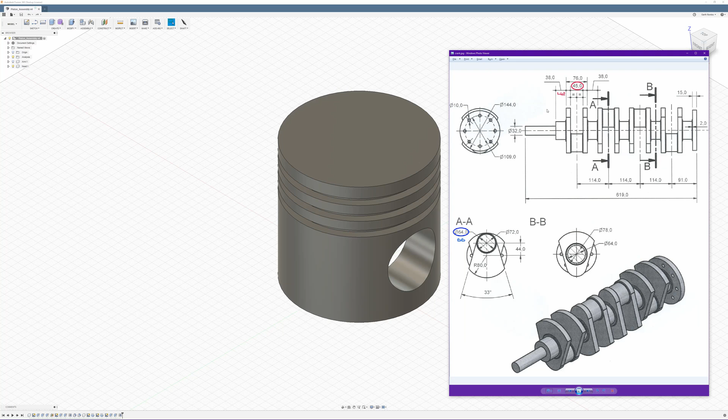Alright, so once again, since we're working with components for an assembly, first thing we'll do is create a new component, and this time we'll call it crankshaft, and then we'll just hide the head since we don't need that.

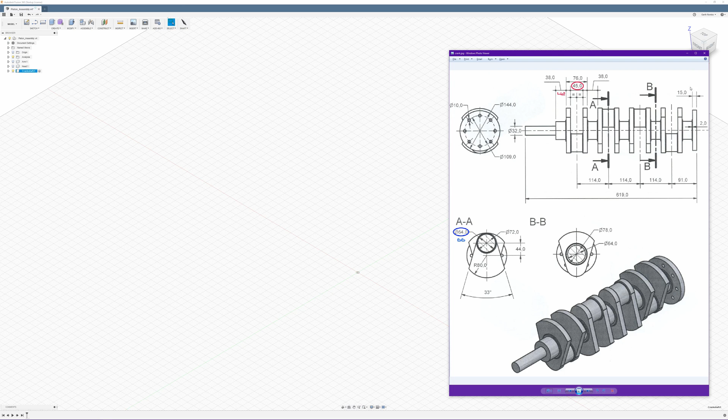And if we look at our drawing, we're going to create this little end bit, which is that little plate down the end there. So if we look at the side view here for it, you can see it has an outer diameter of 144 and a width of 15.

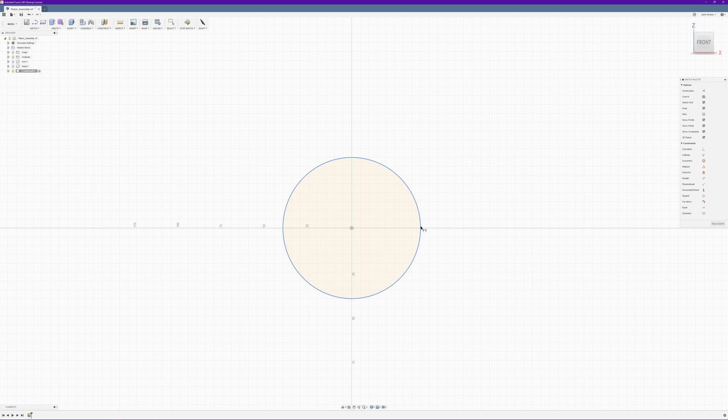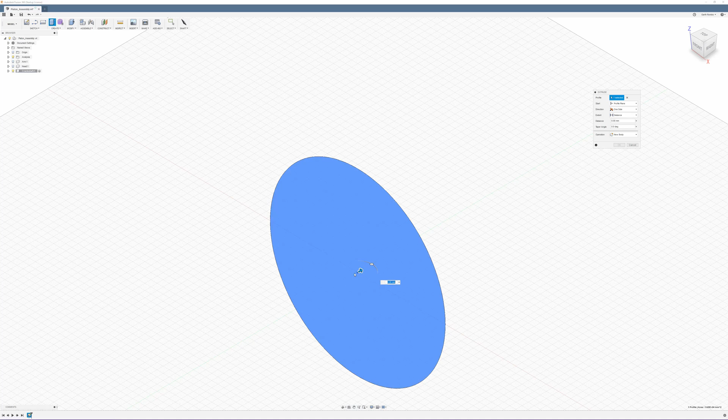So we'll start a sketch. I'll just do it in the front plane. It's C for circle. And then set diameter to 144. Stop sketch. Select the profile, press E for extrude, and drag that out. Just type in 15mm, and we want it to be a new body, so that's all good.

Alright, now if we look at this sketch again, we've got a diameter for those holes of 109, and the hole itself has a diameter of 10.

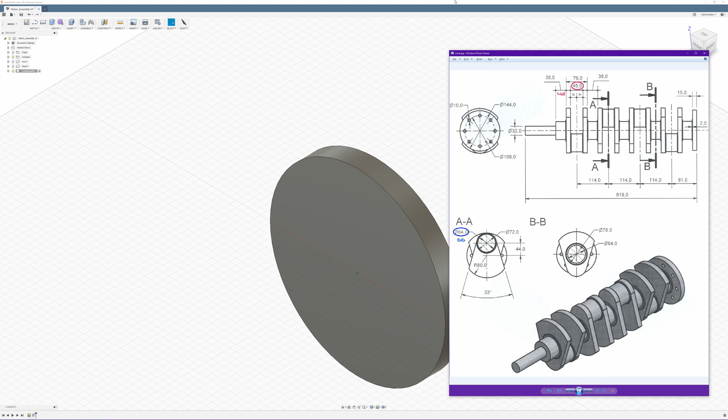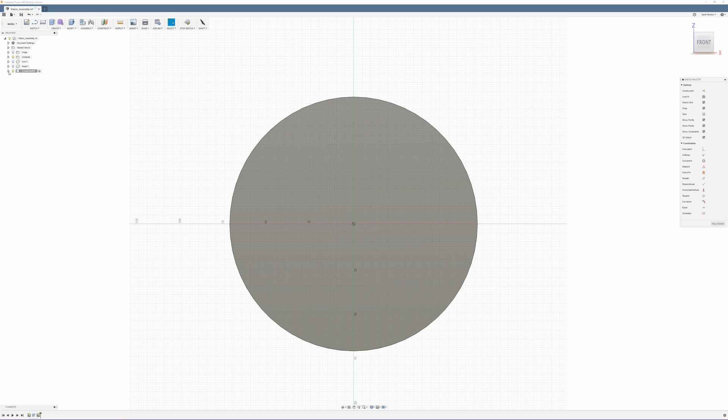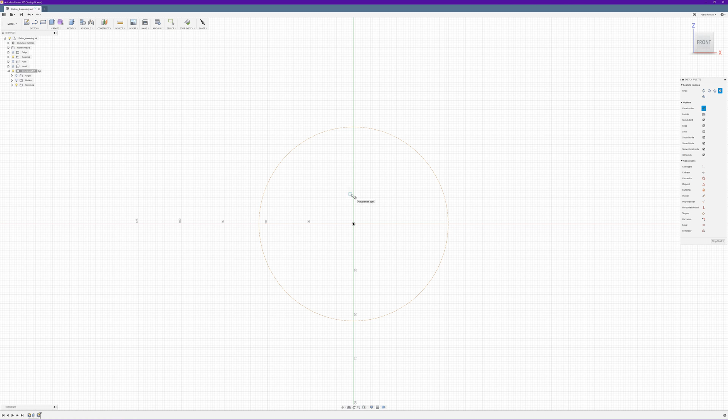Okay, so we'll create a sketch. Since it's on the plane, we'll just do it there as well. Could have done it directly on the face, doesn't really matter. And what we'll do is hide the body for a minute just to make it easier. Turn on our construction, because we're going to use this circle as a reference for where to place our other circle, and I think it was 109.

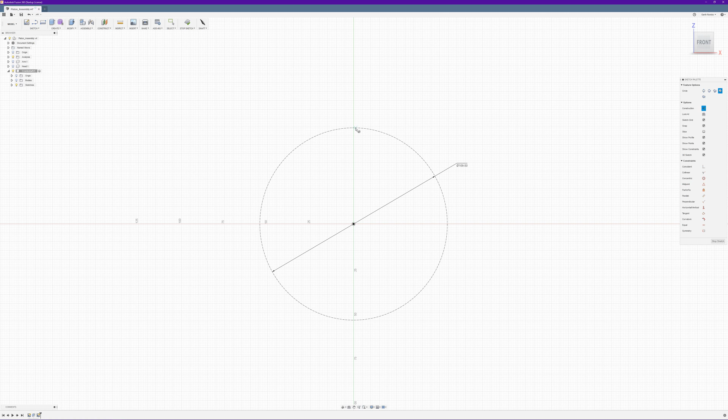Yep. So set the diameter on that to 109, and then go back to our circle tool and just zoom in there. Doesn't seem to want to lock to that one, so it doesn't really want to lock to any of them. Not that it really matters.

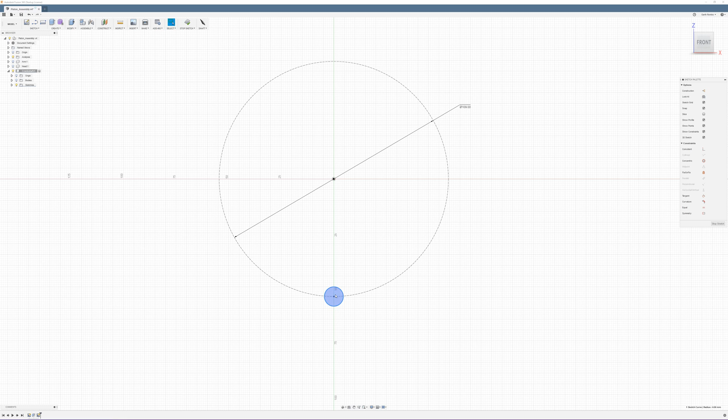So turn off construction. No, have to select it first. Turn off construction, because this is going to be our actual hole diameter. And we could have used the hole tool, but given that we want to put these in a very specific spot, it's probably a bit easier to do it this way. So set the diameter to 10.

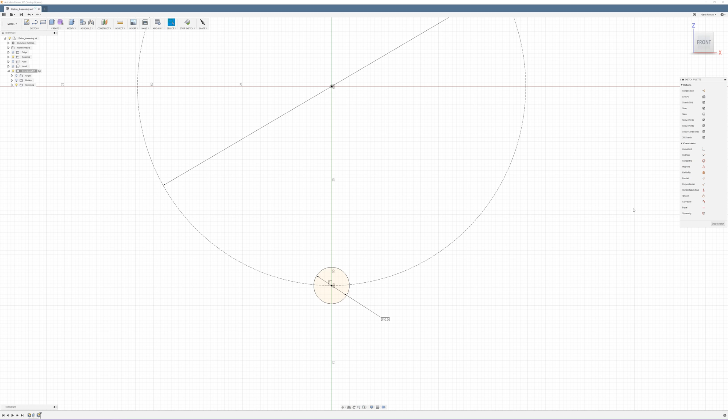And just hit escape. And what we'll do to make sure it is lined up correctly, select that point, and we want horizontal vertical with that, and then we can go, oh actually before we do that, oh actually no, we will do that. Stop the sketch, and then we can unhide our body.

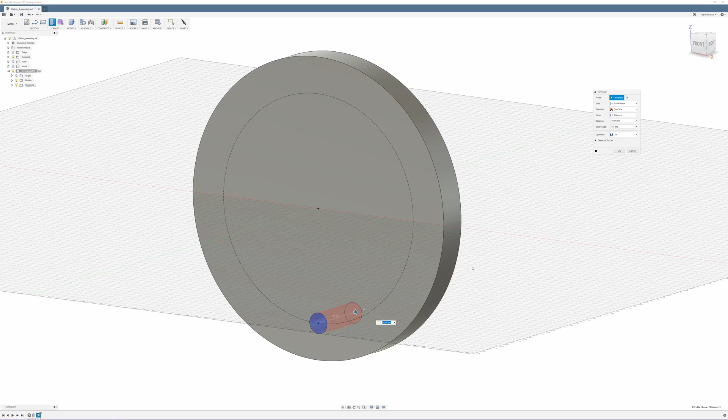Select our profile, go extrude. This time we just want to go all the way through, and we do want it to be a cut. So there's our first hole.

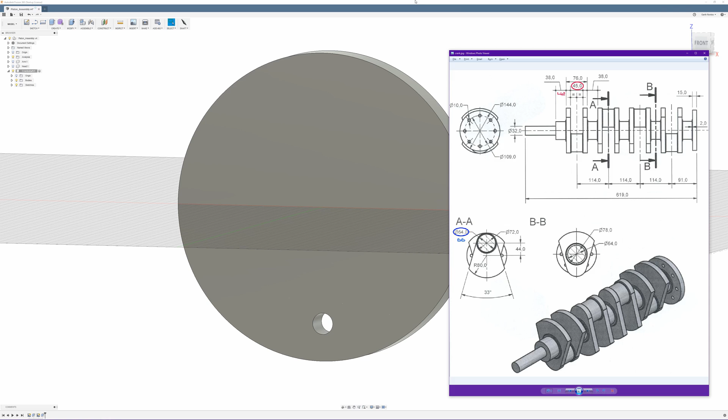Now if we look at the drawing, we've got 4, 5, 6, 7, 8 holes. So what we can do now is pattern.

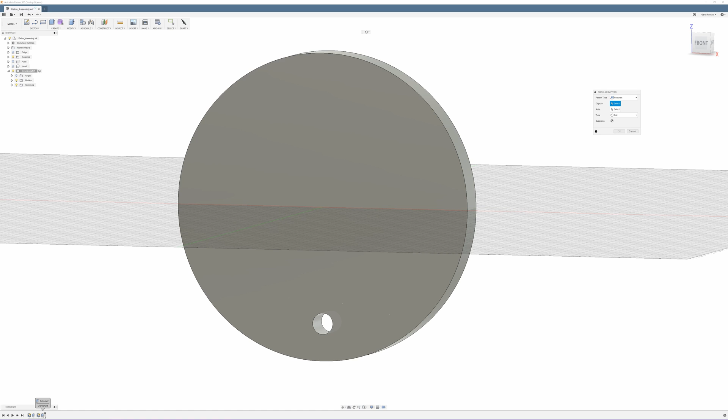Now we want a circular pattern, and we want to do features, and our feature will be that last extrude in the timeline there, and the axis we can select the y-axis, and we do want it to go full, and quantity 8, and compute option adjust, I guess that'll do.

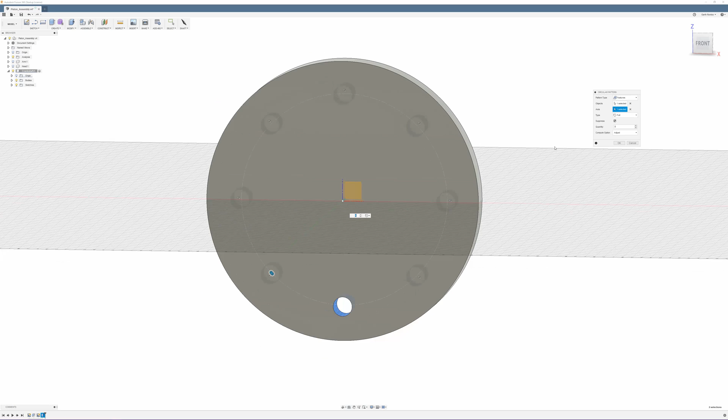Alright, so there's our little initial plate with the holes.

So next thing we want to do is create the central core that joins between the plates. As we can see in drawing B, that has an outer diameter of 78 for the little extrusion bit that sits around the outside of it, and an inner diameter of 64.

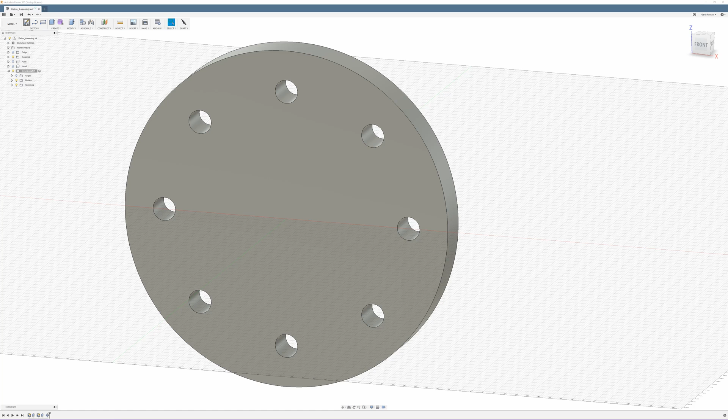So we'll go back and create a new sketch. We can do it on the front plane again. What was that measurement? 78 and 64. So we get circle, might as well do both on the same one. 78, 64. Alright, now we can stop sketch.

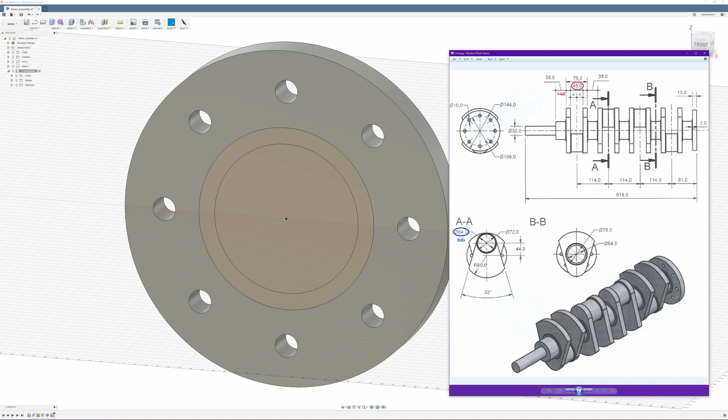And if we look here, the little extrusion thing is 2 millimeters. It's very hard to tell if it's kind of chamfered back towards the surface or not. Doesn't look like it in this one, but the lines there make it look like it is. Probably really doesn't matter, but we'll see how it looks.

So we extrude. This time we want 2 millimeters, or -2 in this case, and we want it to be a join. Yes. Okay.

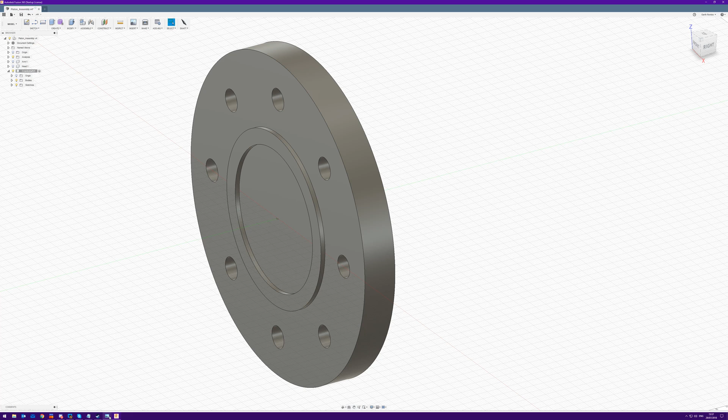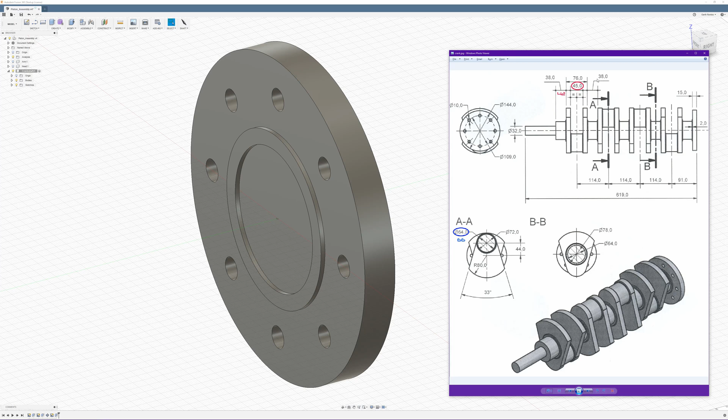And for the next one, that gap there, I'm just going to go off that one there, 38 mil, but that goes from the edge of that plate to the edge of that plate. As we can see here, it's got a distance of 38 between the two plates.

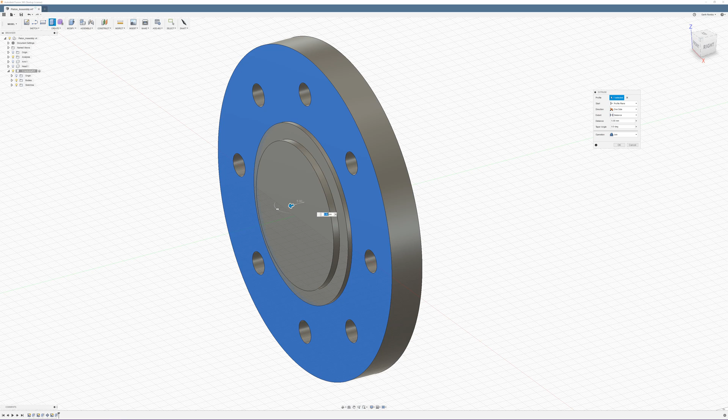So we extrude this one 38 mil, and join. And that's pretty much the first bit of that.

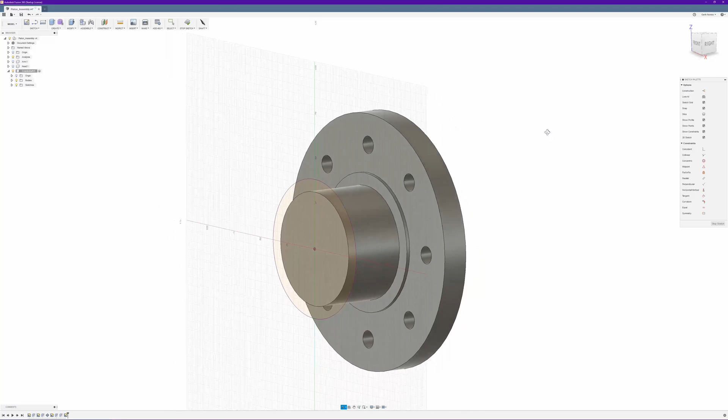Okay, now to create the extrusion on this side, we'll create another sketch. Just select that face, but to save us from having to draw another circle, you can use project include and project the outer circle, and hit OK, and as you can see, that's pulled that across to there for us.

And the good thing about projected geometry in that sense, since we're not altering it or anything, if at a later stage we wanted to make it so that this was actually a little bit wider and we changed the dimension of that original sketch, it will automatically update that projected sketch to match it, which is quite fantastic.

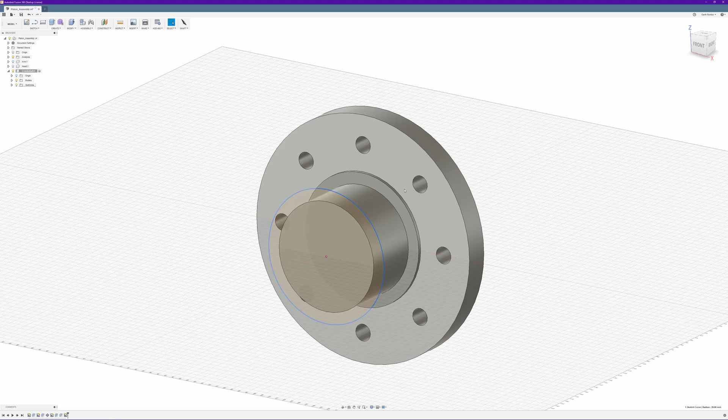But since we do want it to be the same, we can just select the profile itself, hit extrude, and we want to go back in towards it. Just want to make that 2 mil, but we don't want it to be a new body, we want it to be a join.

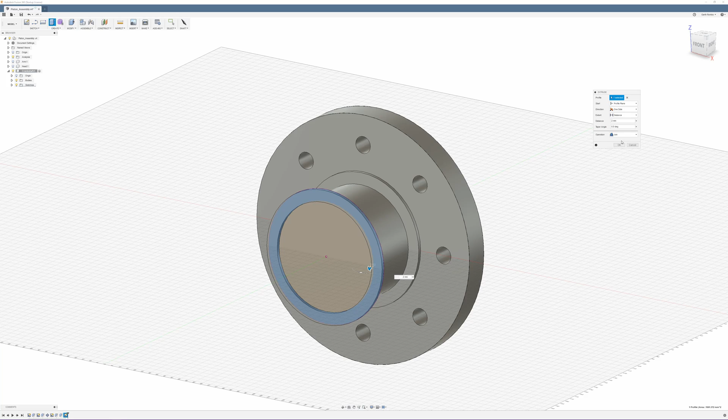Oh, that went the wrong way. So we come back down here and say edit feature, and we'll say -2. That's more like it.

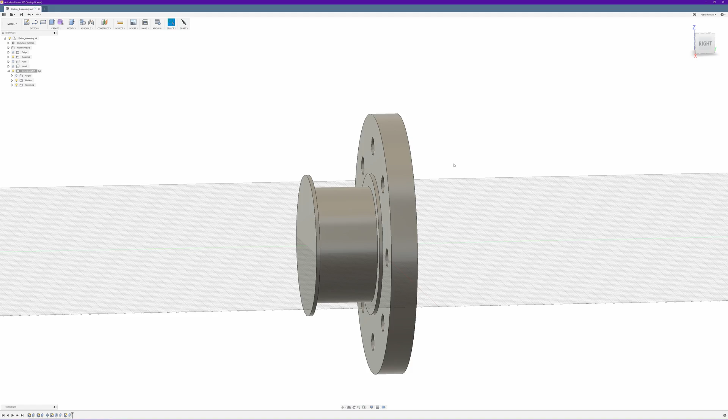So now we're ready to come and create the first of our little weighted plates.

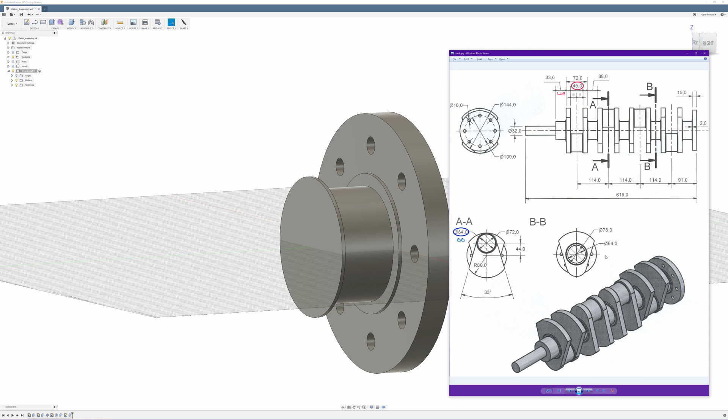Okay, so for this bit we can just create a sketch straight onto this face, and we know the center point is the origin. So if we look at our diagram here, we can tell the center point of this circle is 44 mil up from the center point of the origin, and then we've got a 72 mil circle for the little extrusion on one side of the plate, and a 64 mil circle for the actual cylinder itself.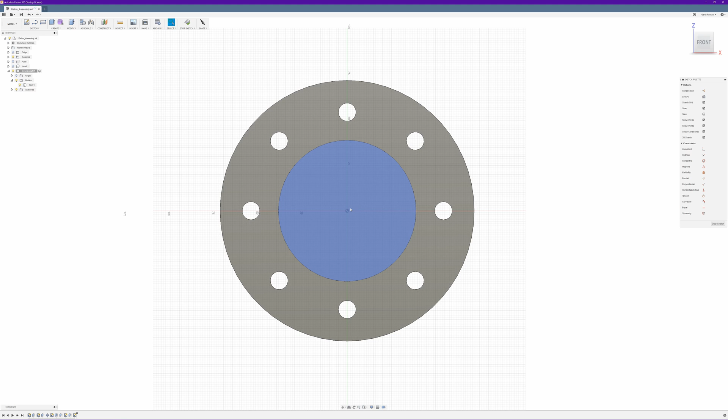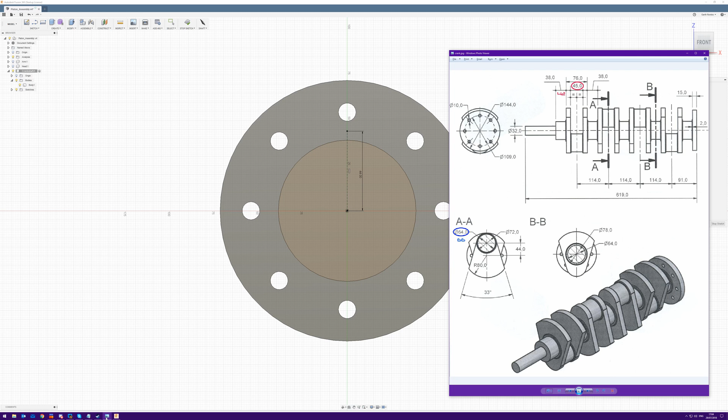So I think the best way to start would be to give ourselves a little construction line, it's probably going to be the easiest way. Just go straight up and set the dimension on that to 44. Was right, 44, yep. And then we'll create a 72 mil circle.

So it does look as though that extrusion joins up with the top edge of the plate itself. So, 72 mil circle, just C for circle. Drag that out. Just take that off construction and set the dimension to 72.

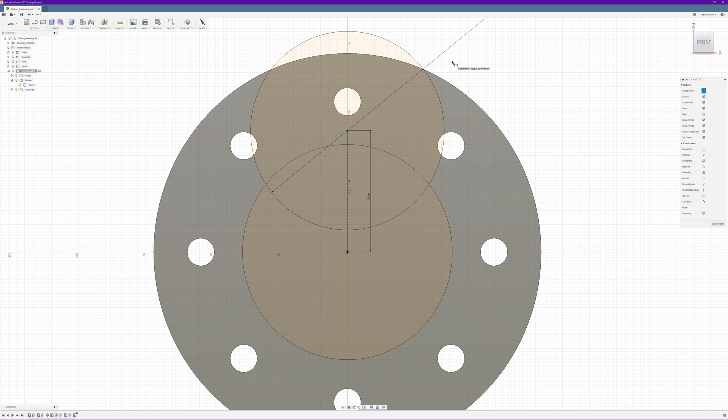And if we look at the diagram and think about how this is going to be made, I'm actually making this from the back side of that, but doing it upside down. We're going to flip that afterwards. I'm just going off this diagram here. So we'll leave the inner cylinder for the moment.

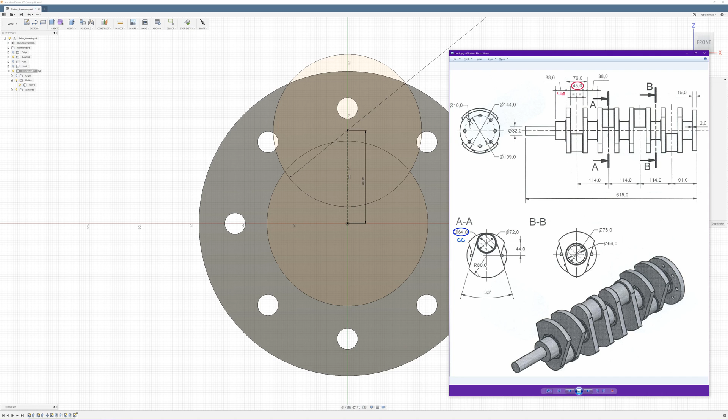And we can see that from the center point, or the origin in our case, there's an arc going around there with a radius of 80. And since it appears to be a circular arc, we'll just do a circle, drag it out, construction's on again, turn construction off, and set out dimension.

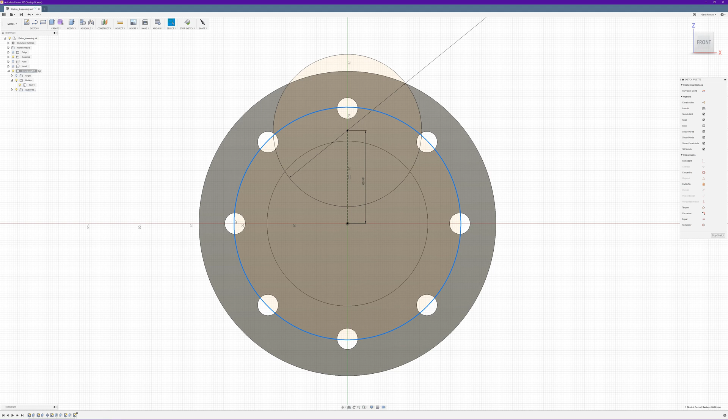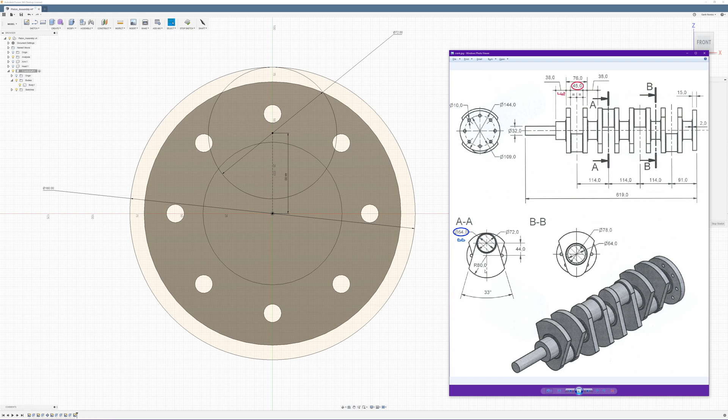Alright, so now to get the side lines, so these straight edges here, they've got an angle between them of 33 degrees. So probably the easiest way for us to do that is if we create ourselves a construction line, and I'm just going to make it really big because I don't actually know where it's going to have to be yet.

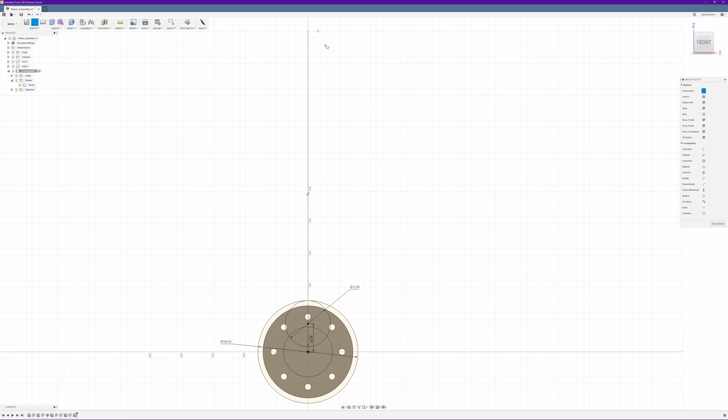Hit OK on that, turn off our construction, and now if we just do a couple of normal lines down that way so that they pass through the 80mm circle, and oops, zoom in a bit there so we can see. About there. Hit OK on that.

And then if we grab our dimension tool, set that to 33 degrees. And yeah, because that point is coincident with that line, now when we go to set our tangency to this top circle, you'll see it just drags itself down along that line to make sure that we're keeping the lines

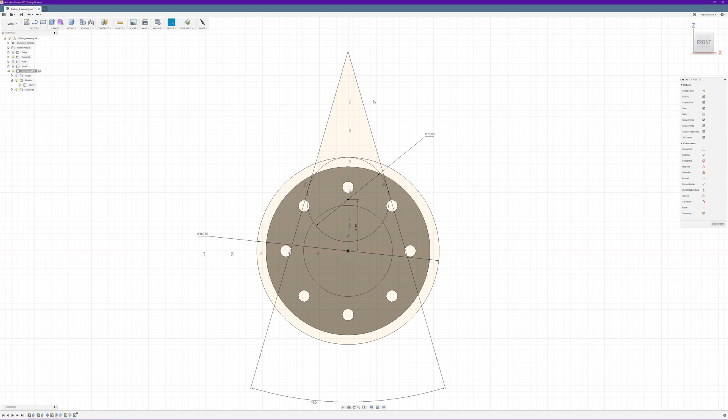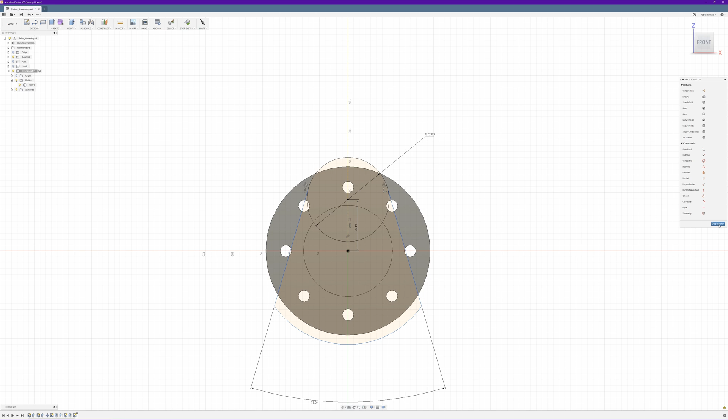Alright, well, to clean this up a bit, we can now trim off some of the excess stuff that we don't need. So hit T for trim. We can just go through and get rid of some of these curves that we're not going to need. Don't need these bottom bits either. It's alright, constraint warning. But I'll leave this inner circle here because we'll use that to create the outer rim of the extrusion on the other side of it. Just to save us drawing another circle.

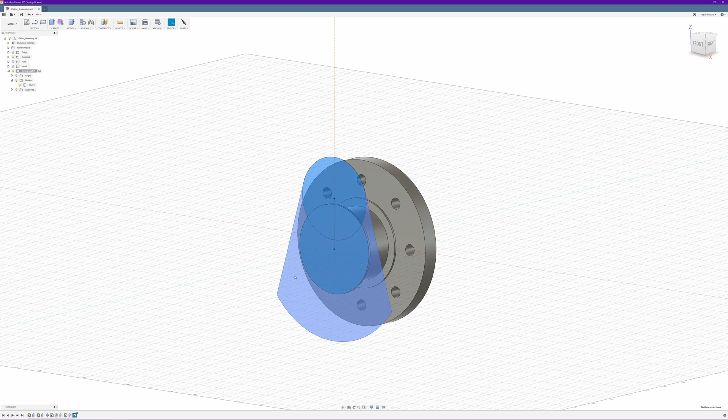But for now, if we look at our profile, you can see we've got the shape of our little plate, if you want to call it that. I'm not really sure what they actually call it, to be honest. But we'll select all of that, hit E for extrude, and pull it out at 15mm. And we do want it to be a join. And there you have it.

If we look at our sketch, if you do the math, these plates actually work out to be like 15.5mm or something. Really not significant enough to worry about for the purposes of this video. But the next thing that we want to do would be the extrusion and the inside circle for the cylinder between the two. And as you can see, I've created it upside down, but again, doesn't really matter for this.

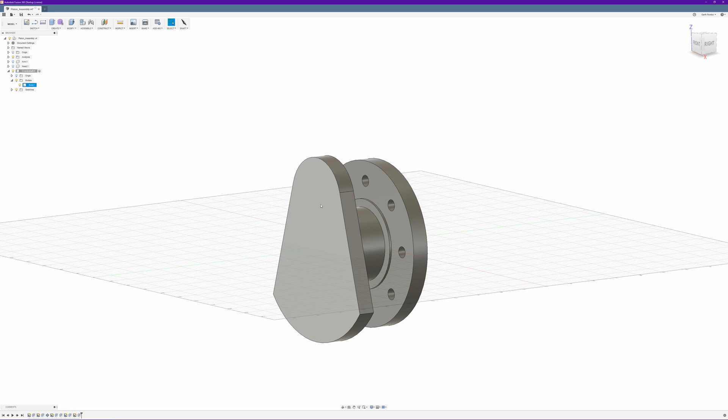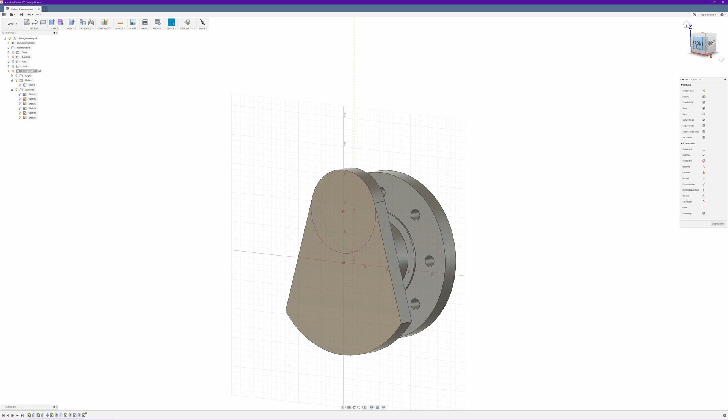So now we can create a sketch on that face, and again we will project, just unhide the previous sketch for a second, project that circle through, say OK. I'll just go back to our front view, and the inner circle we want to be 66, C for circle again.

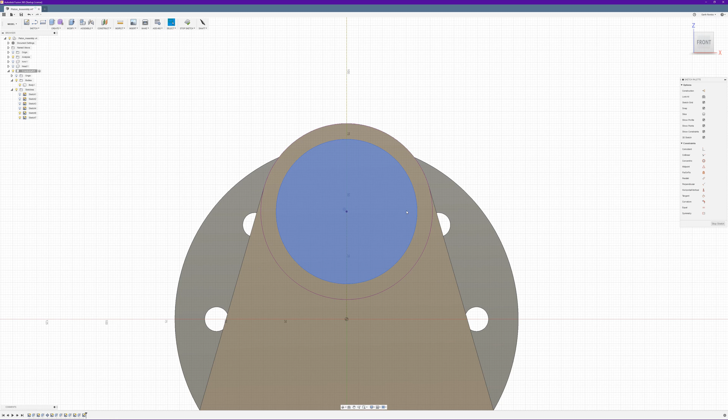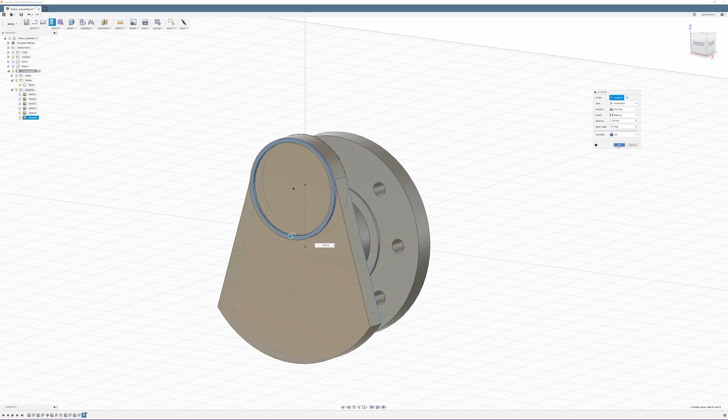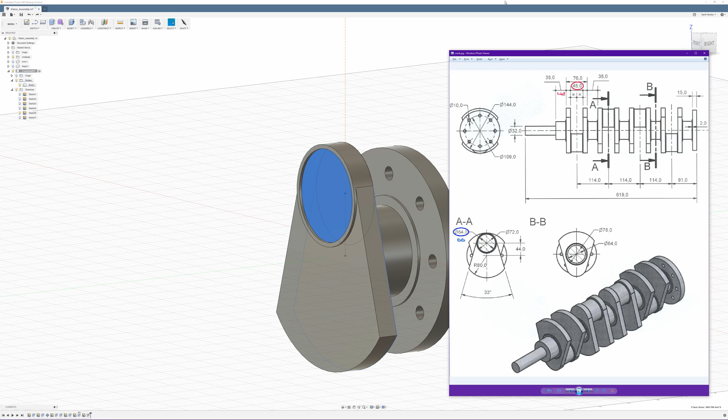Set the dimension of that one to 66. And we can stop sketch. And we can extrude that one. What I might actually do for this one is probably bring it out halfway and then mirror it, because as you can see it's got a matching plate on the other side. So normally that would extrude 42 mil.

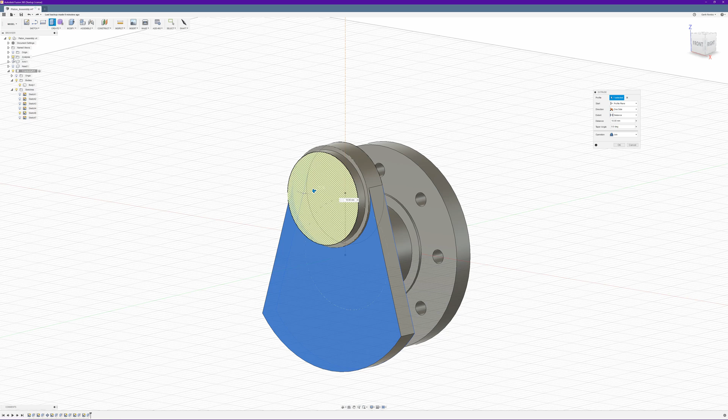So rather than that, we'll pull that out, turn off our analysis plane, and pull that out to 21. We do want it to be a join. Features, and the features we want would be that one, that one, that one, that one, that one, and that one.

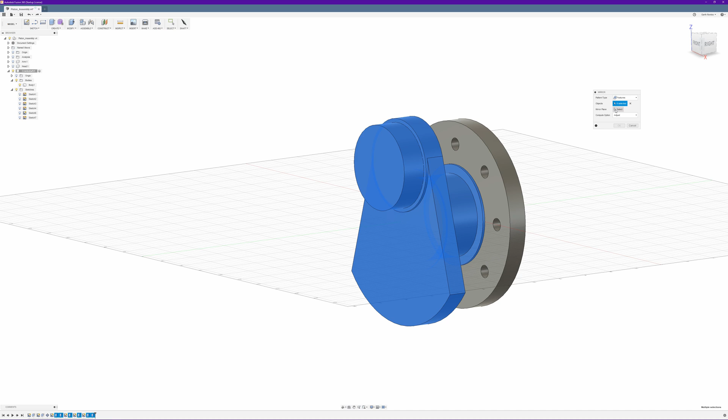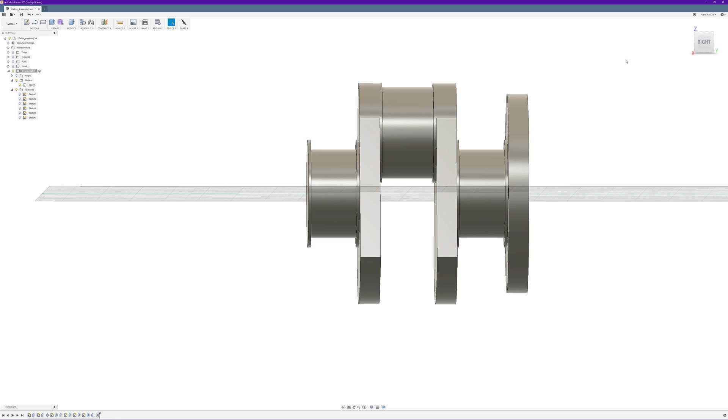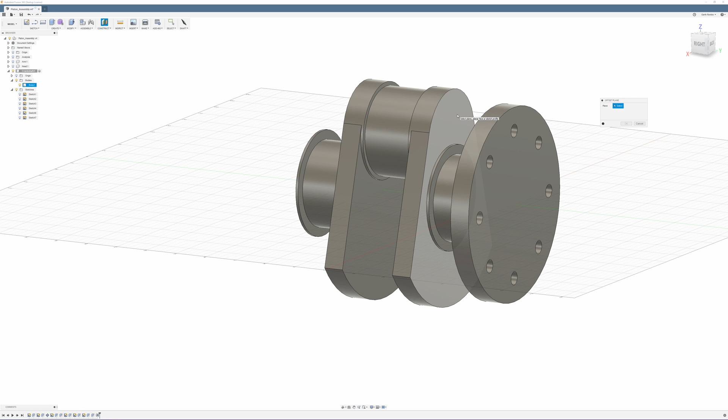Okay, so for the next bit, what we pretty much want to do is copy this entire section here over and then flip it around. And the easiest way to probably do that is to actually split the body temporarily. And to do that, we need to make a construction plane. So we go offset plane, and we want it to copy from there because we've already got the extrusion on the other side. So we'll just select that face,

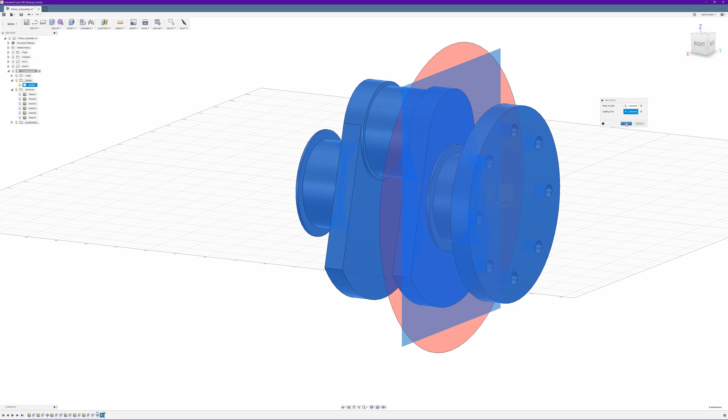and now if we go to modify, split body, we can say that body, and splitting tool will be our construction plane, and we hit OK. So now you can see we've got two bodies up here. We've got that one and that one. So we can just hide our construction plane because we don't need that.

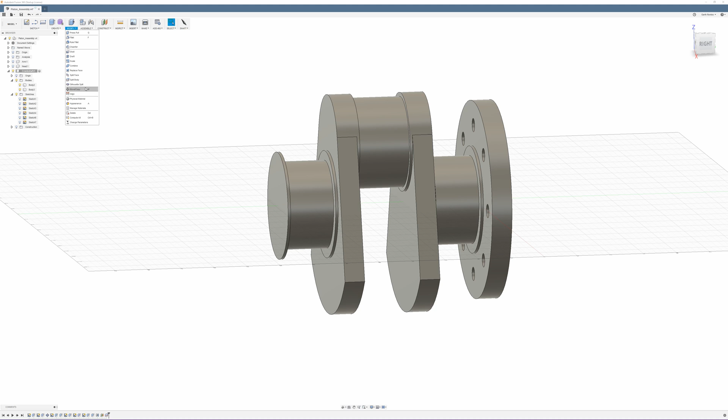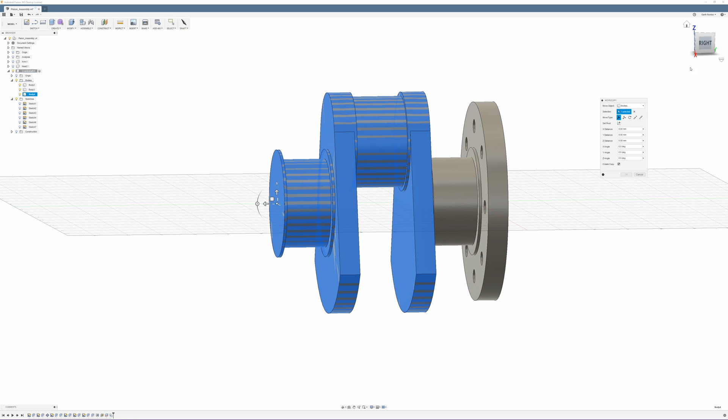And we go up to modify, move copy. We do want bodies, so we select our body. I might even select it there. Nice, right in the center point. And check that little create copy box. I'll just go to right view so we got a good reference.

And yep, that's spot on. Only thing is, we also want to rotate it 180 degrees so that it's facing the other way. And as you'll see from our drawing, although the first one goes up in that one, the second pair goes down, and then the next one goes down, and the last one goes up.

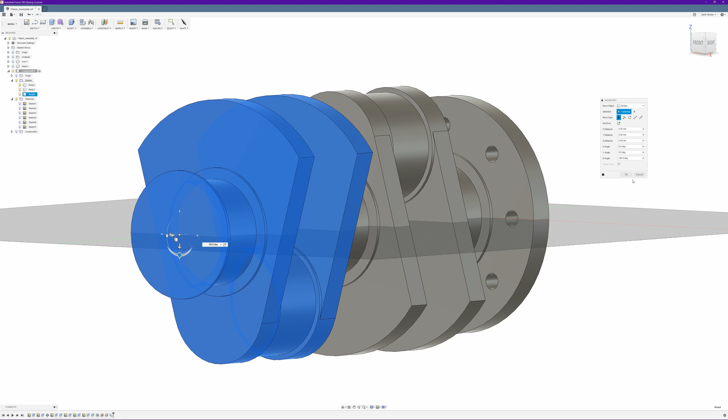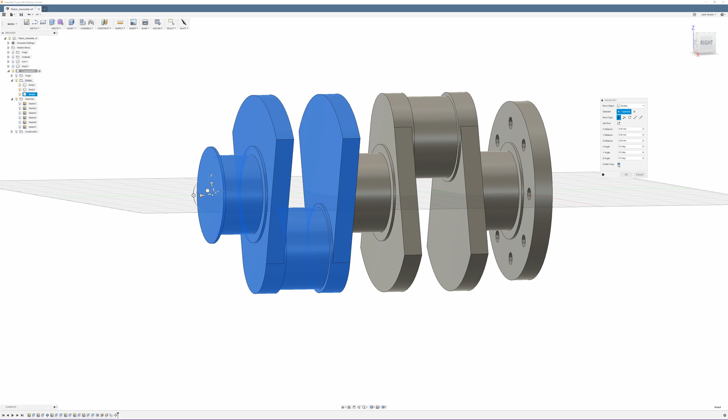So we hit OK on that, and we'll actually repeat that. So go move, copy, create copy, back to our right view, drag that across, except this time we don't want to do the rotation. And one more time for good luck.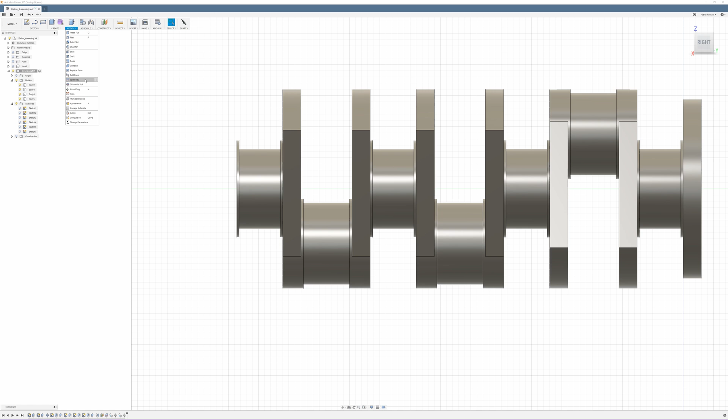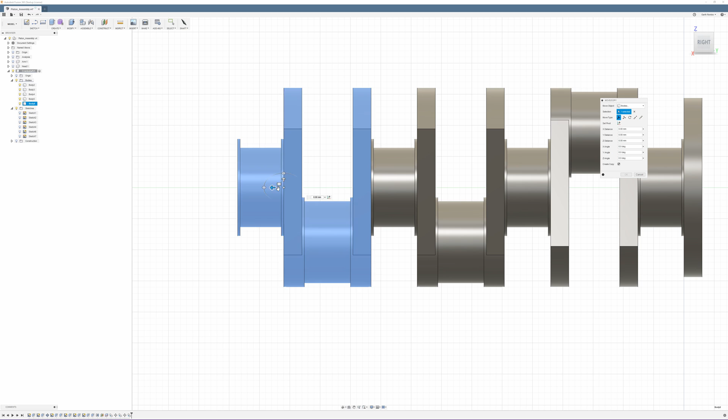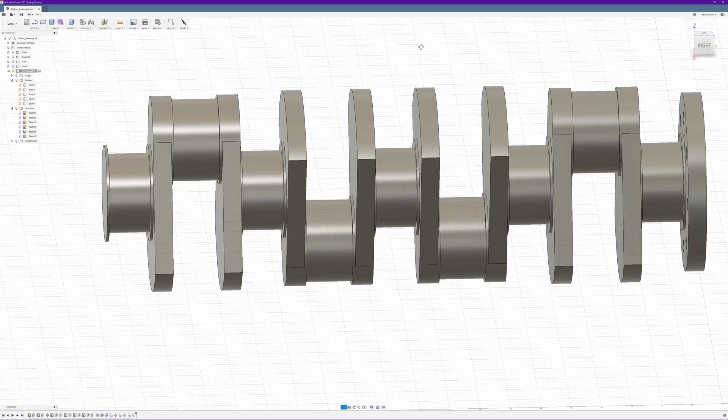Move copy, that can be a body, centroid, good. So go, oops, enable the copy and drag it across. Except this time, again, we want to do our rotation. Just type in 180 and OK. And there you can see we've got our nice little crankshaft.

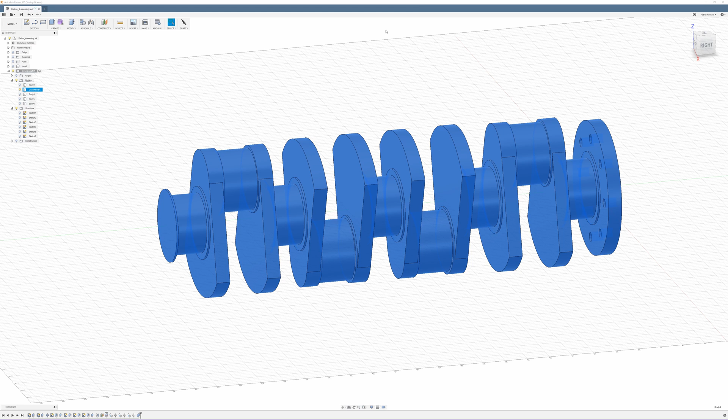So now what we need to do is actually join those bodies back together, which is very easy to do if I can remember where it is. Combine, there we go. So target body, we'll just make it the first bit, and then the tool bodies will just be all of these. Oh, looks like we've got another duplicate there. Maybe it's just a display anomaly. We don't want to make it a new component. Just hide those. So this is going to be our main crankshaft body now. That's all one piece.

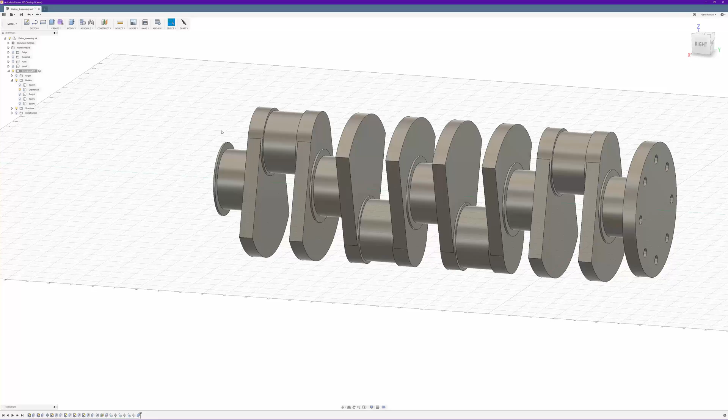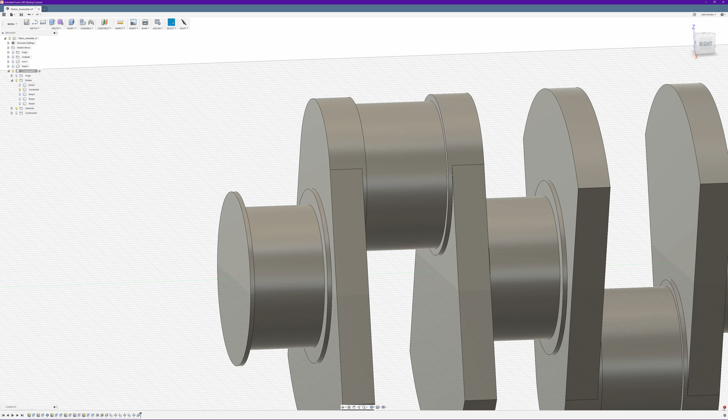The only other bit that is missing is the two extrusions at the end, but you'll notice that because we just did our copy, we've also got that little rim around there which we don't want. Now you probably find that I can't actually delete that. I don't know why. For some reason Fusion just seems to have issues with ends of things like that when I've done copies in the past. Yeah, as you can see here, it's got an error. If we click on it, it'll no doubt be extremely vague. The operation could not heal the edited region of the model. So helpful.

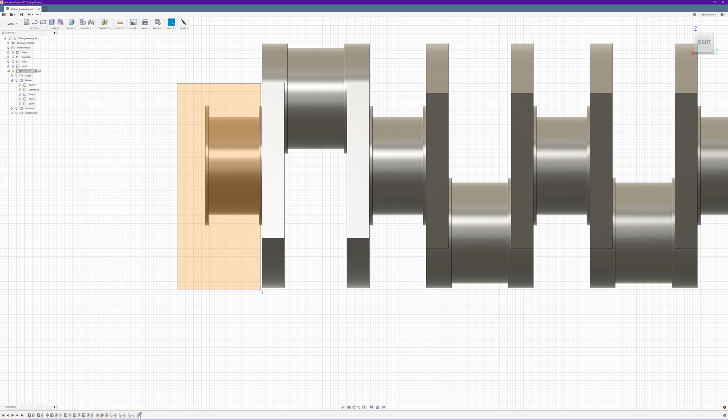So in that case, what we'll want to do is actually delete one further. And of course it selects everything again. So we just hold down Control, drag around that to deselect. And deselect, oops, deselect that face. And now it'll delete. Honestly got no idea why it does that, but it does.

So if we come back to our drawing, we've still got our extrusion on that side. Now we just need the little 64mm one, and we need to drag it out 38. I know that 42 is under there, but that belongs to the red circle, so I want to drag it out 38 if we're going to be accurate.

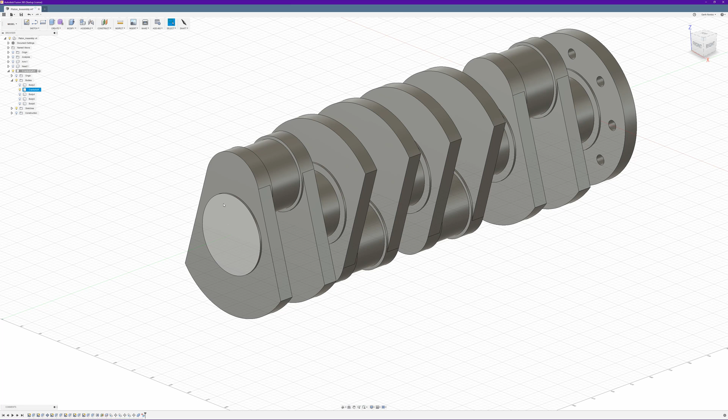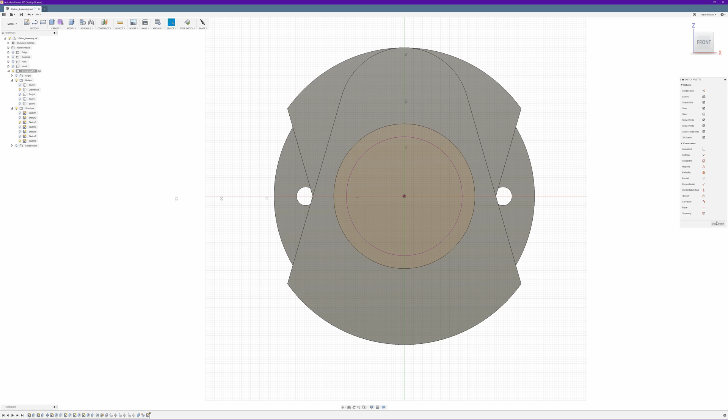So we'll create sketch, and we'll just grab our other sketch. There we go. So we come down and project, and we just want to project that inner line. Okay. Stop sketch.

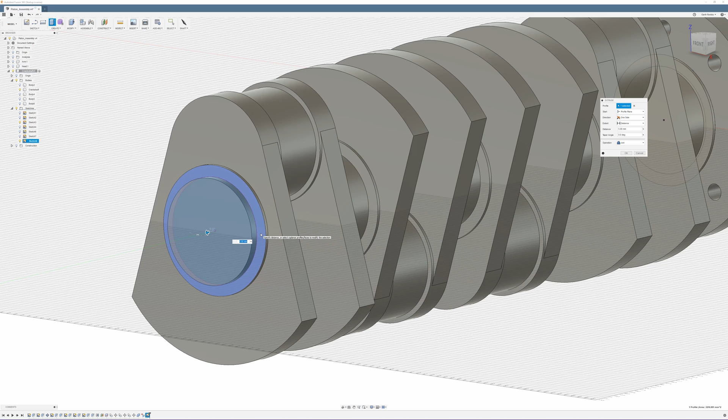Now we just select the inside profile, and it'll actually be 36 because it's already got the 2mm extrusion there. So E for extrude, pull that out, and 36. Okay.

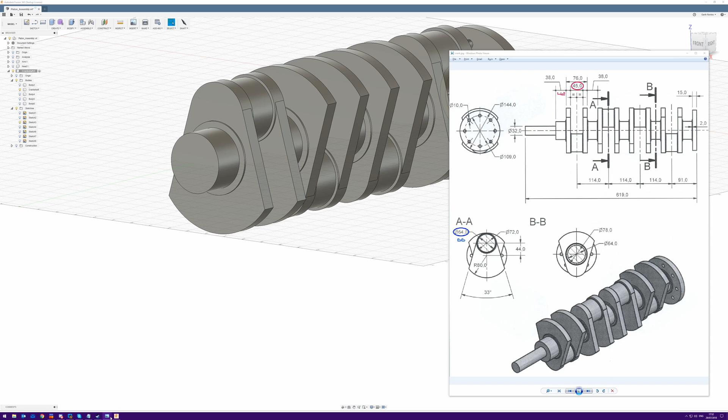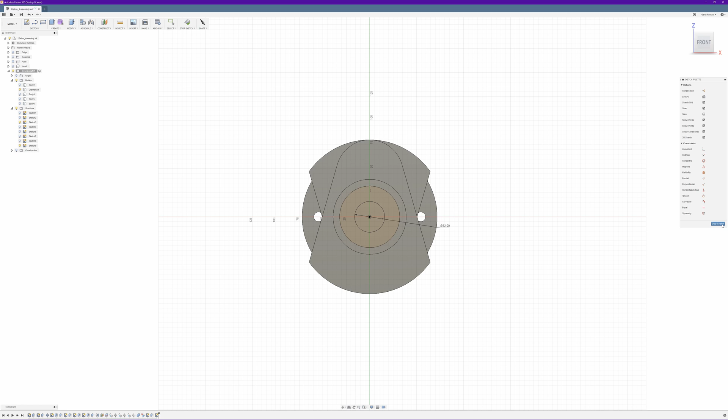And we've got a 32mm diameter on the inner one. Doesn't have a length on it, but we'll just drag it out whatever length we see fit, but we'll create a new sketch just on that end one since we don't have a circle of that size already, and set it to the origin, drag it out, use our dimension tool, and we want it to be 32. Stop sketch, E for extrude, and just drag it out yay far, that'll do. And there you have it.

Alright, well there you have it. That's how to model the crankshaft. And yeah, as I said in the intro, I'll be back shortly with part 4 to show you the actual assembly and sort of animating it, as it were.